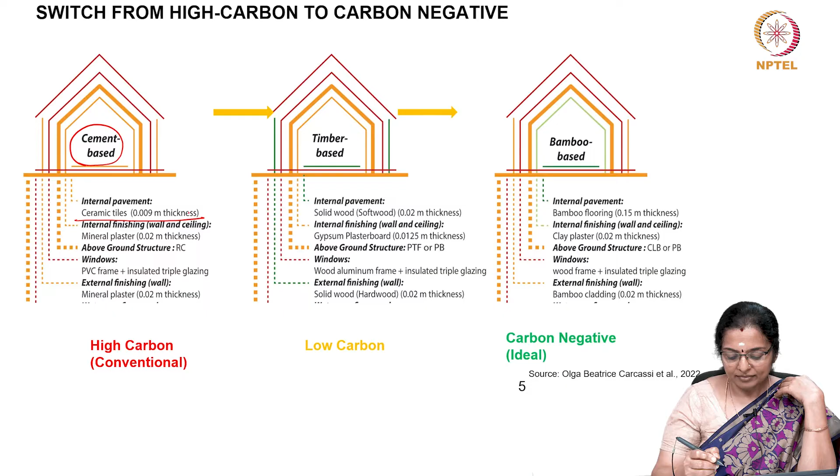In this building, suppose the internal pavement is made up of ceramic tiles of say 0.009 meter thickness, 9 mm thick ceramic tiles. Last time itself I had given you an example of how decision on tiles can impact the embodied emission and the embodied carbon. In this building, the pavement is made up of ceramic tiles. Now, you need to understand the embodied energy and embodied emission, the repercussions on this. You need to understand how much energy goes into its manufacture.

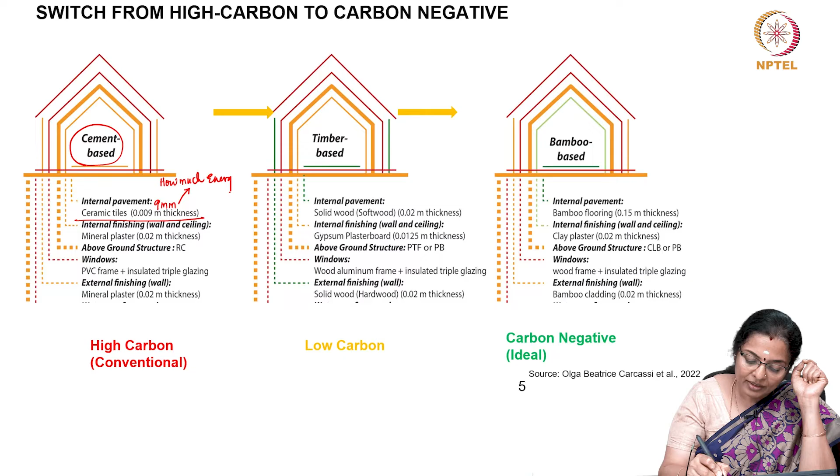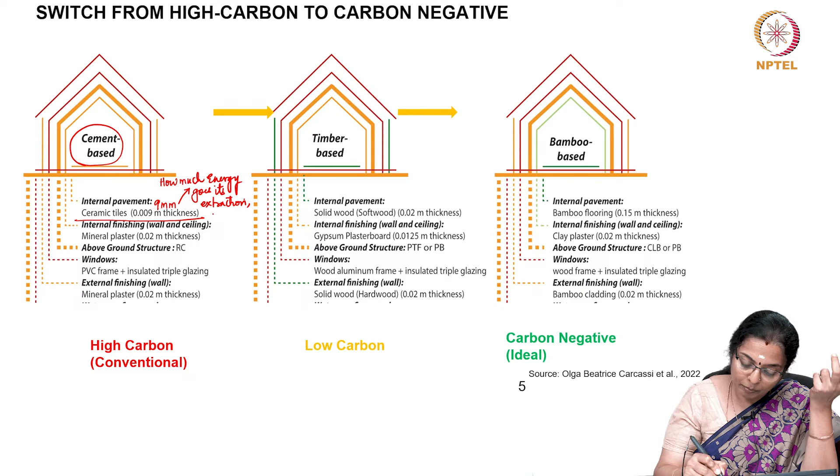So, how much energy goes into its extraction of raw materials and manufacturing process, not to mention its transportation. In comparison to that, suppose the client is advised to go for something like a softwood. So, 2 centimeters softwood. What is the embodied energy repercussion of using 2 centimeters of solid wood?

So, how much energy would go into its extraction? What is extraction here? Extraction would be to get a natural product. Wood is a natural product, but wood also has some life. There is some more sequestration left in wood. So, you need to understand what is its extraction, and at this stage extraction is say felling of a tree, maybe a mature tree, and then its manufacture, yes, it does involve some energy in its manufacturing from a wood to becoming a pavement.

And third is its transport. Yes, some amount of transportation would be involved, but not to the extent of a ceramic tile, which is a high carbon material, because it may be probably transported from the adjoining state, whereas the transportation of this solid wood would be within the state. Let us assume so. Let us look at the third decision that could be made on the same aspect of internal paving.

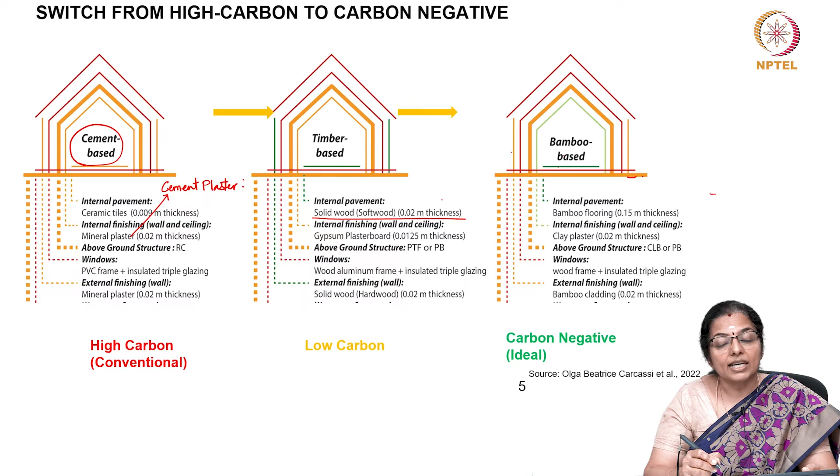Now, cement is a very carbon intensive material. Its extraction has humongous repercussions on the environment, and its processing using clinker and things like that, which we will see in the forthcoming classes also, is extremely high. So, cement is a very energy intensive material. Mixing this cement with sand makes it an even more energy intensive material.

And cement is not a local product. Cement has to be brought from a longer distance. So, the extraction energy is very high, the manufacturing energy is extremely high, and transportation energy is also high because it is not a local material.

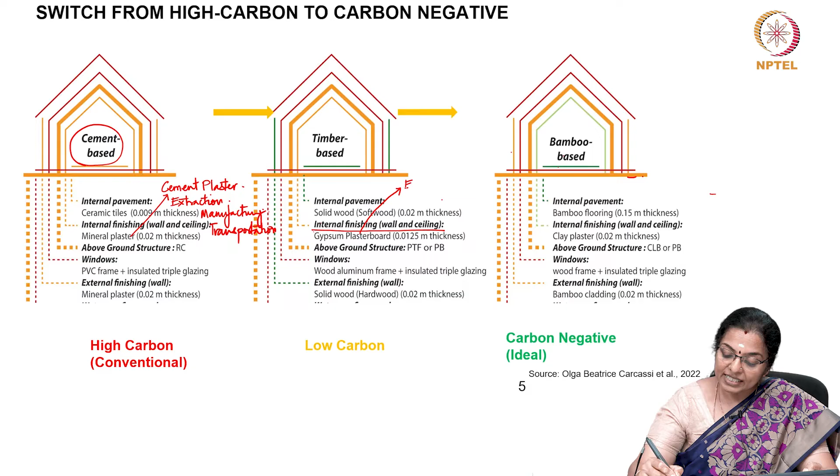In comparison, let us look at the decision that is taken on the internal finishing of wall and ceiling of a low carbon building. If it is just gypsum plasterboard, its extraction, yes, does have some amount of energy, but definitely not as high as cement plaster. So, its extraction is not as high. So, I will say extraction is medium energy consumption. Its manufacturing further is only medium.

Its transportation and erection is extremely less because you are already using it in the form of a plasterboard. So, its transportation energy is medium to high, but its erection or construction energy is very less. Whereas for a cement plaster, all this is very high.

The same thing you consider for bamboo. For bamboo, you need clay plaster. The plaster is clay. Imagine the extraction or retrieving energy for mud. It is very, very less. Manufacturing, hardly any manufacturing goes into it. There is nothing to manufacture. It's very less. Its transportation, mud is a local material and therefore that is also very less.

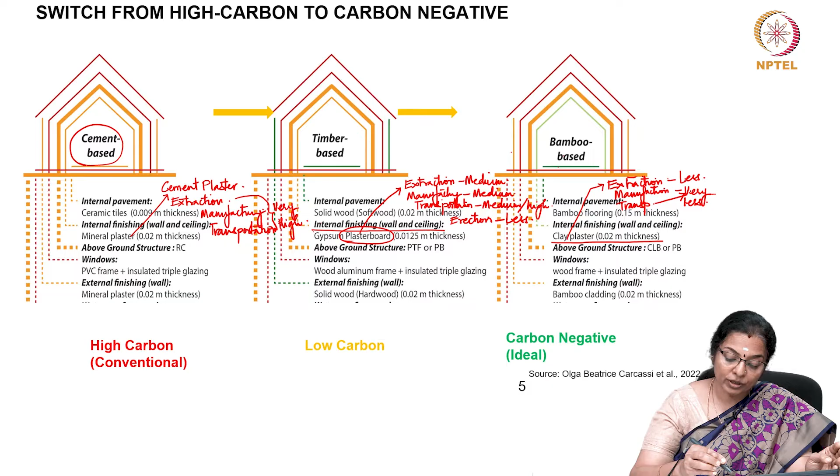Hence, the decision taken to use plaster, whether you want to use a conventional cement plaster, or a low carbon plaster such as a gypsum plasterboard, or an extremely low carbon, almost zero carbon material like mud or clay plaster, makes a lot of difference in the total embodied emission of that building.

And now let us look at another component, which we do not talk more about because its quantity in a building is less. Nevertheless, it is also a very important contributor to the overall embodied energy of that building, and that would be windows. Before that, let us look at the ground structure, the masonry.

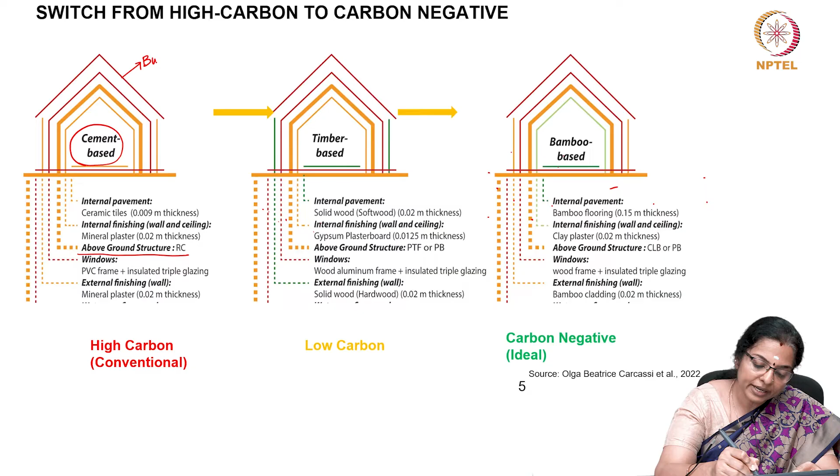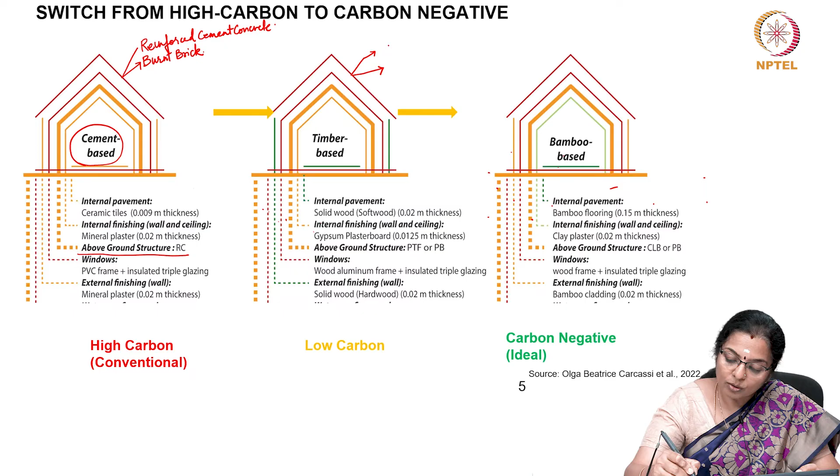Depending on whichever masonry structure you want, suppose in a cement based building, I am just giving options, you use RCC, reinforced cement concrete, for the ceiling, and you use burnt brick. Whereas in a timber based building, you use something like CLT for the ceiling, and for the walls you could use any of the low carbon materials.

Say you can use CSEB. Think for a moment what CSEB is. And for bamboo, I am talking only of walls and ceiling. You can have bamboo reinforced ceilings, quite used in Kerala also. And for the wall, you can use bamboo itself, or you can have stabilized mud walls. You can use either.

So, this itself shows how much embodied energy reduction can happen when you use alternate materials to high carbon building materials. By high carbon, I mean reinforced cement concrete for the roofing, burnt brick for the wall, and for low carbon you can go for compressed stabilized earth blocks for the walls.

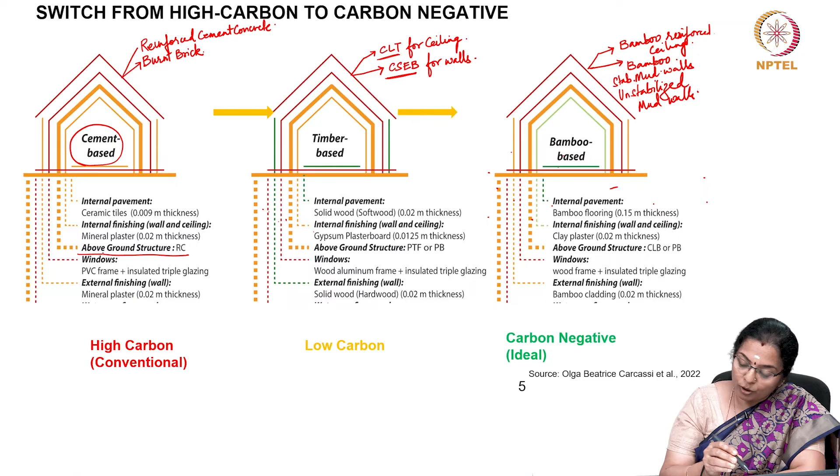Another important component which I wanted to talk about is windows and doors, which we tend to avoid addressing, but that is also a very energy consuming thing. Suppose you have a PVC frame and insulated triple glazing. See, PVC is a very synthetic material, and a humongous amount of energy is required in its extraction and manufacture. Insulated triple glazing involves a lot of glass, and the manufacturing process is also very energy intensive.

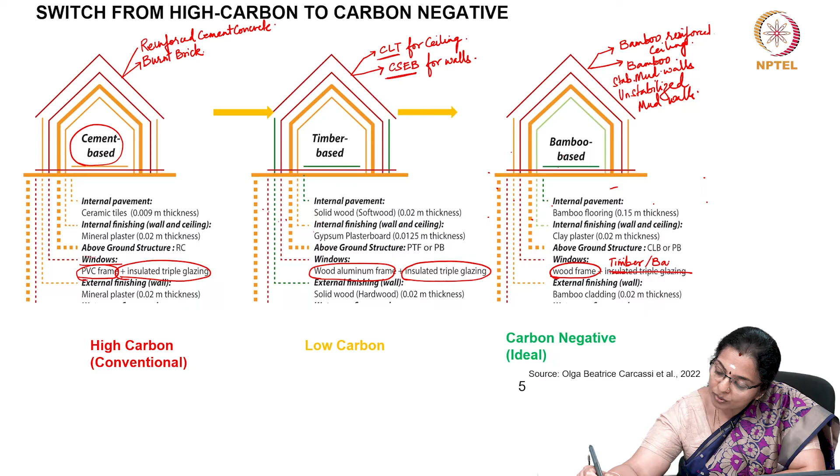Whereas in a low carbon building, you could choose to have a wood aluminum frame, a combination of wood and aluminum, and insulated triple glazing. Whereas in a bamboo based building, just wood frames would do, and there is no need even for glazing. You can avoid this glazing and have timber or bamboo windows, leading us to carbon negative.

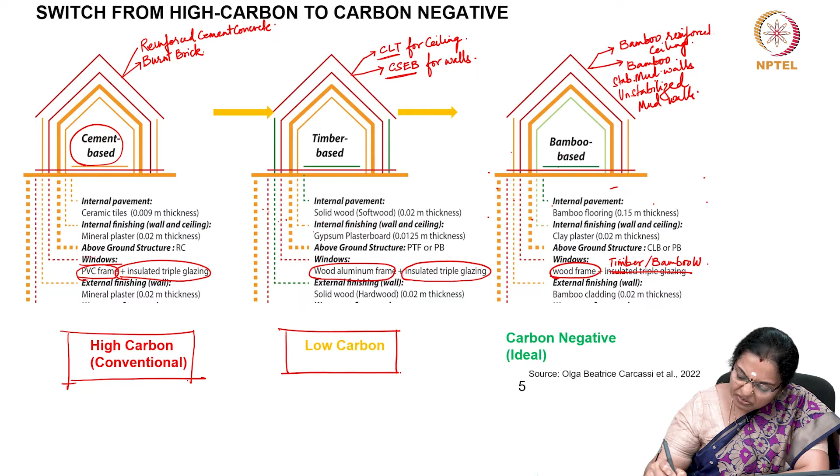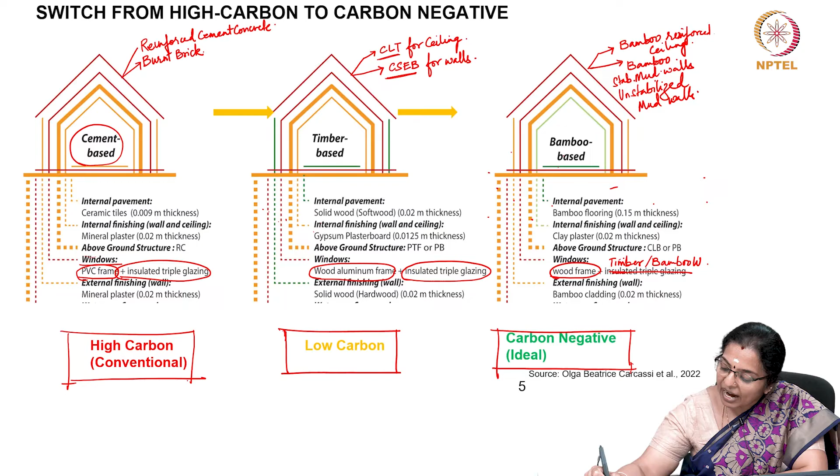So just our choice of building materials is so important in making a building either high carbon, which is the conventional way of material selection and construction, or low carbon, which is finding some clientele in a very niche area, or carbon negative, which is the most ideal situation. And this is what the world needs today if we need to meet our emission goals.

So we need to shift slowly. So this shift is very important. Just to give you perspective, let us look at the embodied carbon of some of the insulation materials.

Now you look at cork slab. Now this comparison shows the difference in embodied energy that can be achieved by shifting towards a natural material. So if you look at the sequestered and embodied carbon per meter square of the wall, just look at polyurethane unfaced or even polyurethane expanded, the embodied energy, and look at the embodied energy of some other materials, like

as we go up, probably cork slab or cork board. The embodied energy is so less, but you should also understand that there is no sequestered carbon. It does not hold any carbon in this polyurethane expanded or polyurethane unfaced, whereas a humongous amount of carbon is held or sequestered. So sequestered carbon is very high in natural products such as cork slab or cork board or wool board or flax.

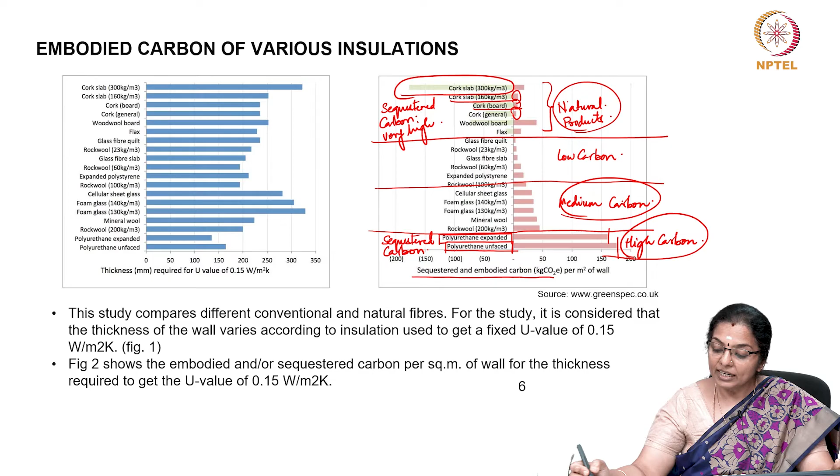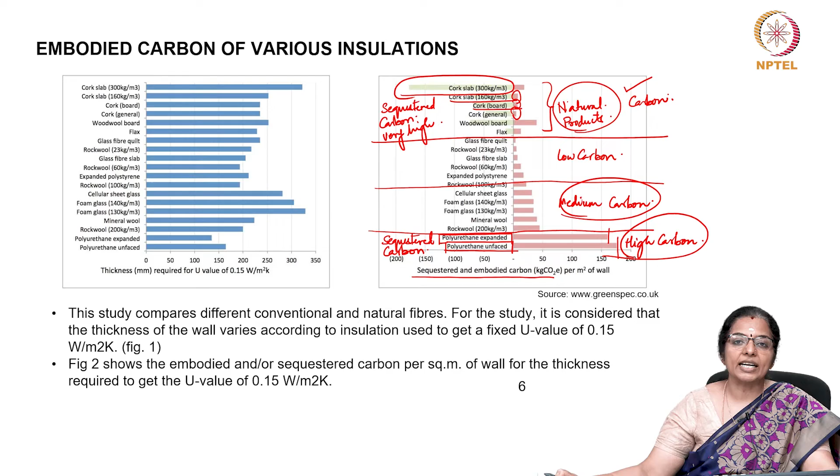So these are choices which you will have to make very early in your design along with your client. So sitting with the client and talking to him and going for natural products, the point being, even if you have to maintain after some time, still the embodied energy for maintenance is not going to be too high. But if you have to maintain high carbon or medium carbon, the embodied energy is going to be very high. And the bonus of having natural products is that you still have a lot of carbon to be sequestered. And therefore, I am reiterating that it is very important to have the appropriate building material choice.

Now, I would just like to give you a perspective about what happens when you start using recycled materials. Aluminum is the most recyclable and the most recycled material in use today. Aluminum has very high initial embodied energy, in fact it's one of the highest. But if you are using recycled aluminum, that's the least you can do for the material choice you have made. Now you see, for reprocessing, the energy savings is very high when you start using aluminum as compared to steel, and for glass the embodied energy savings is very less. We will come to this graph a little later.

Let us understand some basics, that aluminum recycling involves remelting the metal, which is cheaper and more energy efficient than its production from raw bauxite, which is done through electrolysis of aluminum oxide. Already in the previous class, we have discussed how aluminum is extracted. Bauxite, being a very spongy ore, is found in virgin forests, and therefore to extract aluminum itself means that you will have to destroy some forest area. You may go for replantation, that's a different thing, but first a part of the ecosystem is destroyed.

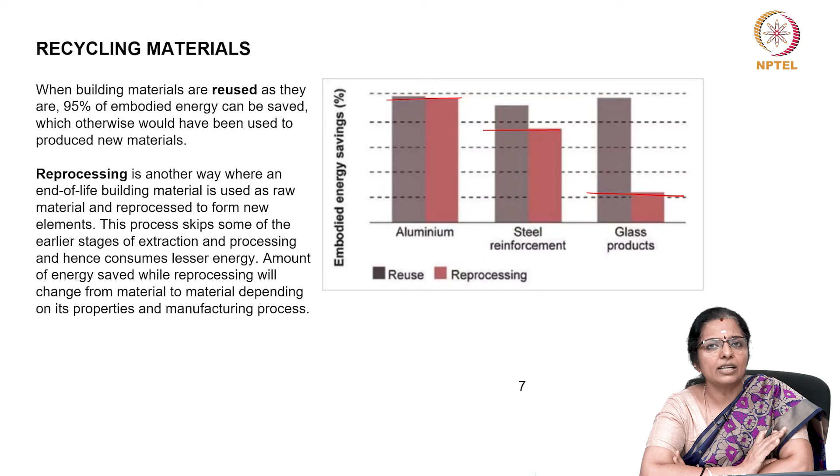Now, steel is also continuously recyclable without any impact on its properties. The property does not get degraded. Steel scraps are collected and sent to foundries where they are melted down in a furnace that runs at very high temperature, probably around 3000 degrees centigrade. And then it is purified to get rid of the contaminants. This steel which we melt is again solidified and sent as raw materials to various factories. Now, this can save up to 75% of the overall energy used in the production of steel from raw materials.

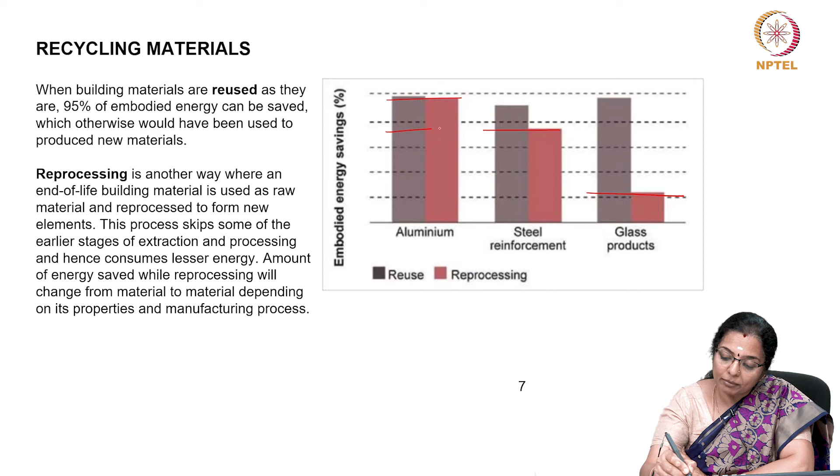However, we should note that compared to aluminum, the savings for recycling of steel is less, but its savings as compared to having to manufacture a completely new product is very high. That's up to 75%.

Now, glass is also 100% recyclable, and you can endlessly recycle. Once you recycle the glass, you use it, and then it's of no use again after some years, 30 years, 50 years, you could again recycle the glass, and there will be no impact on its quality.

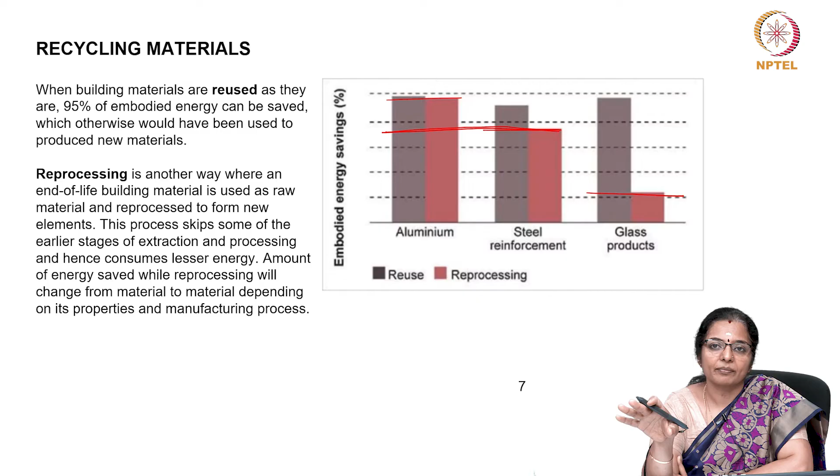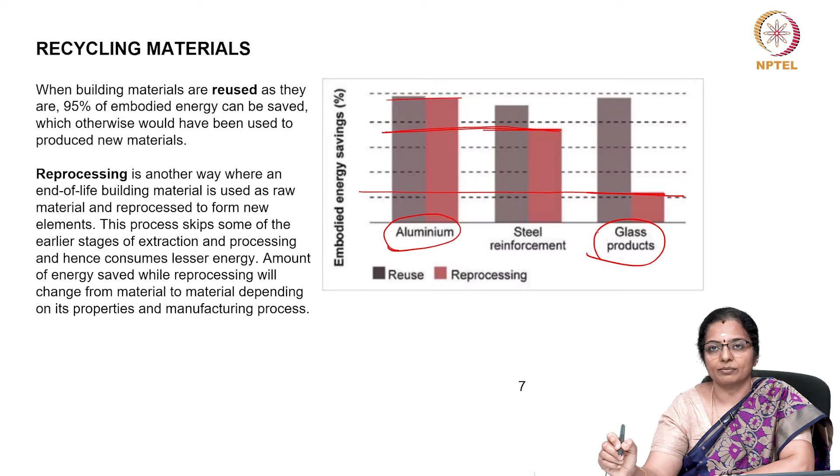The major source of embodied carbon in glass is the energy to heat the furnace to melt the raw materials. Now, this process anyways has to be carried out even while recycling. Hence, recycling of glass does not save as much embodied energy as aluminum or steel, as you can see from this graph. Therefore, if you want to consider a recycled material, aluminum is a much better choice as compared to glass or as compared to steel.

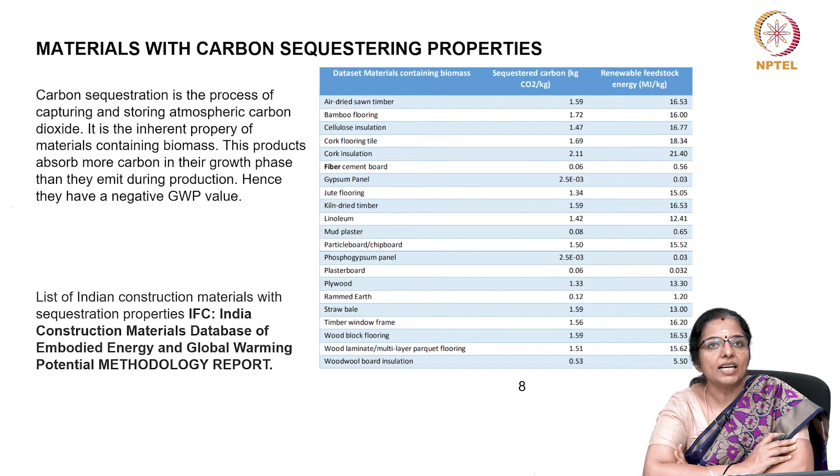We will quickly see materials with carbon sequestering properties, because I had been talking multiple times about carbon sequestration when we were discussing the use of cork products. So, carbon sequestration is the process of capturing and storing atmospheric carbon dioxide. So, it is like the inherent property of the material because it contains the biomass. So, the carbon is not yet released from the material, but it is held in the material itself, and therefore all natural products will have carbon sequestered in them.

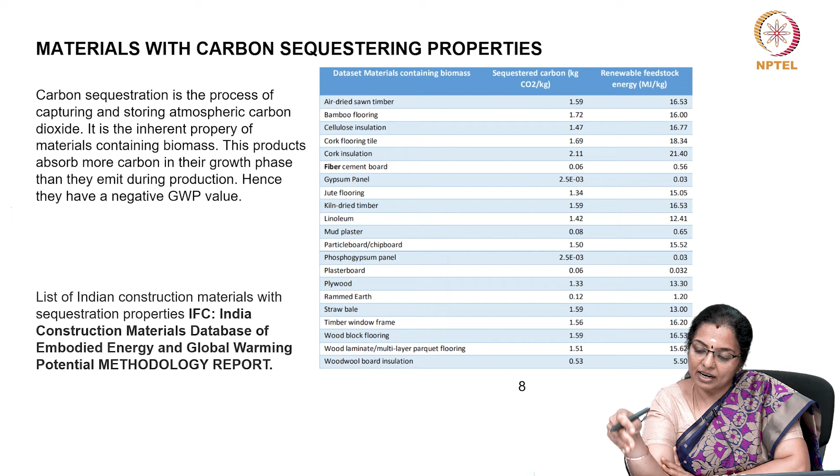These products absorb more carbon dioxide in their growing phase than they emit during production. Therefore, it is assumed that these products have a negative global warming potential value. Here I have shown some materials which have sequestered carbon, and what is their renewable feedstock energy.

So, you can see air dried sawn timber or bamboo flooring has very high sequestered carbon, which means it consumes more carbon in its growth phase and holds more carbon than the carbon that is needed to make it into any product, and you can notice it is a natural product. So, even amongst natural products, bamboo seems to have a very high sequestered carbon, as much as timber. We can well imagine that timber also has more carbon in it.

And again you can see cork, all cork products, they have large amounts of carbon sequestered in them. If you look at any of the natural products, whether it is straw bale or timber or wood, any wood based product, you can see that the carbon sequestration is high in them. The carbon sequestration is in the range of 1.5 to say 1.75 kg carbon dioxide per kg of the product.

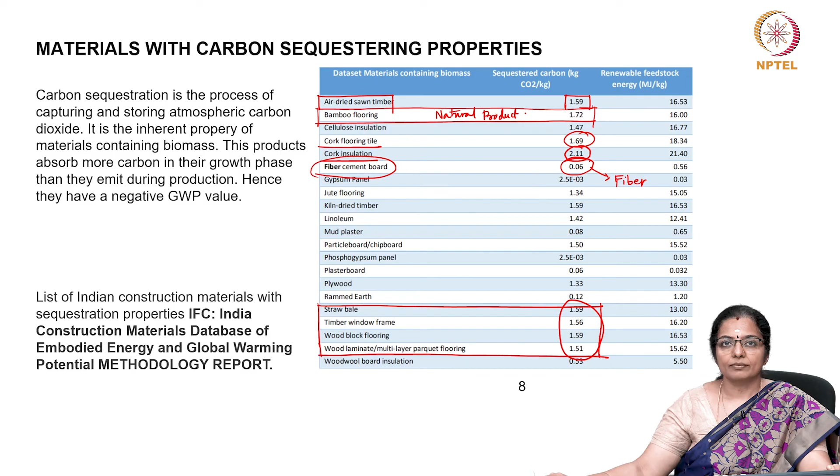And so this gives us a perspective about what materials have more carbon sequestered and therefore are kinder to the environment and therefore support decarbonization by having reduced embodied carbon emissions. They are all made up of natural fibers, or they all have some natural material in them.

And another thing we have to be careful about is which component consumes most of the embodied carbon. Based on that, we can decide on an alternative building material for that particular component in such a way that the embodied carbon will be reduced. So, we already know that embodied carbon emissions are associated with materials and construction process through the whole life cycle of the building, not only at the initial stage.

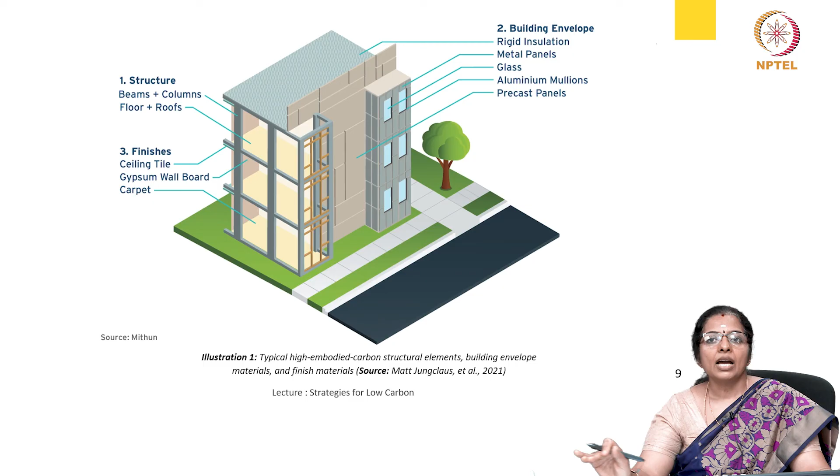Now, our choice of low carbon materials becomes important because there are certain components in the building which can consume a lot of embodied carbon. They can hold a lot of embodied carbon, and therefore we need to identify this. That is where the early design stage is important. Catch it young.

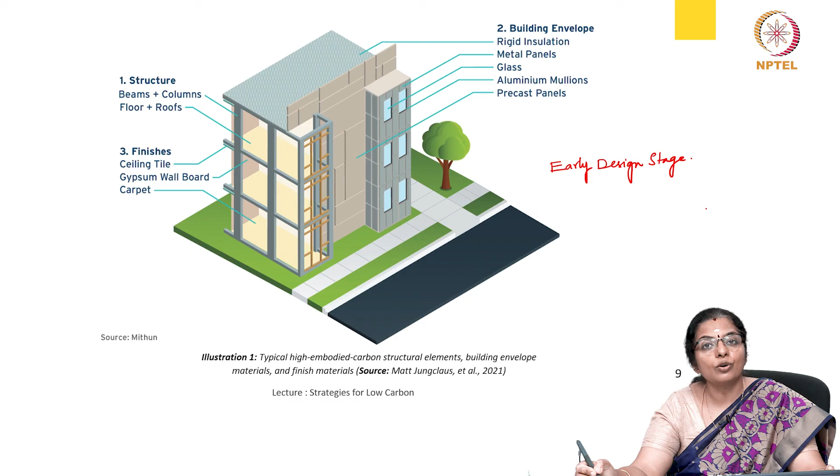At an early design stage, make your decisions about what building materials you want to use, how you want to manufacture, or rather from which part you want to bring those building materials. So those decisions become very important in ensuring that we have a low embodied carbon building. And that is what our topic was today. And this will be one of the important ways to reduce embodied carbon in buildings.

So, I will leave you with this, and of course, the gist of this: we have seen how our choices of building materials will result in either a high embodied, high carbon building, or a low carbon building, or a negative carbon building, an extremely green building. And these choices are definitely in the hands of the architects and designers, taking the client into confidence.

So we will close this lecture now to continue with further ways and strategies of how we can reduce embodied carbon.